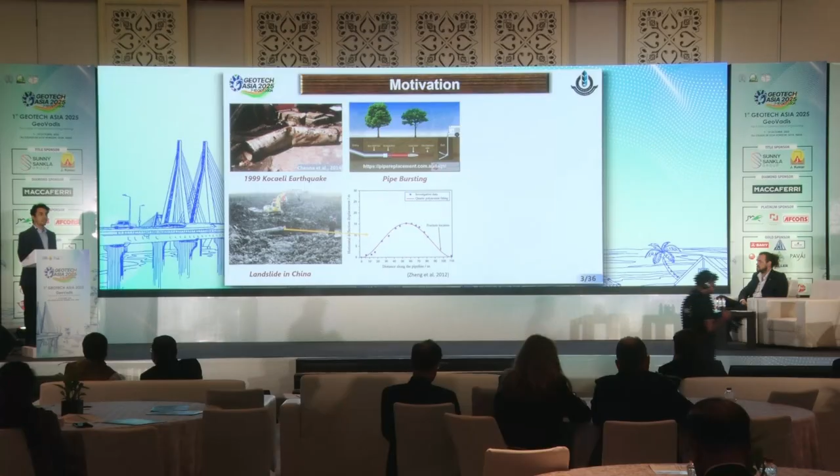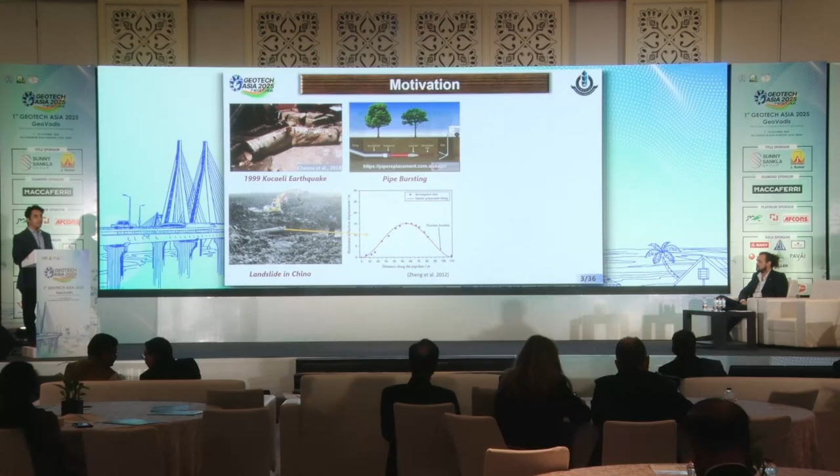Another source of loading that can cause pipe failure is pipe bursting. Pipe bursting is a trenchless technique. During this operation, an expander is attached along with the new pipeline, and the new pipeline takes the position of the existing pipeline. During this pipe bursting operation, ground heave is generated, which can have a severe impact on the surrounding underground utilities, if any.

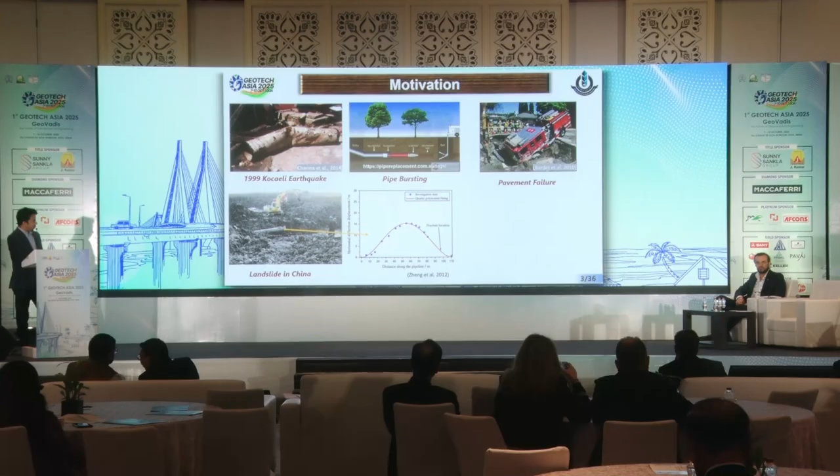Nowadays, pipelines are very often placed below the road pavement, either across or along the direction of the traffic roads. So pipelines also fail because of traffic. We have to design the pipe in such a way that it can sustain the overburden pressure and also the heavy traffic load. Pipes can also be subjected to blast load.

So this is another pictorial presentation. A blast load can be surface waves, an underground blast wave, or above ground, that is, an air blast. The blast source can be a terrorist attack, accidental damage, or blasting required for construction. This pictorial shows the different types of blast and their sources. Typically, we can design the pipeline analytically considering the blast as an exponentially decaying function.

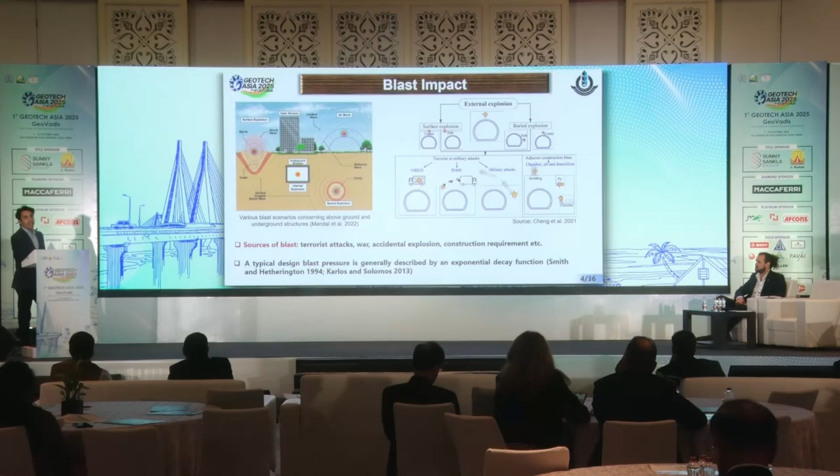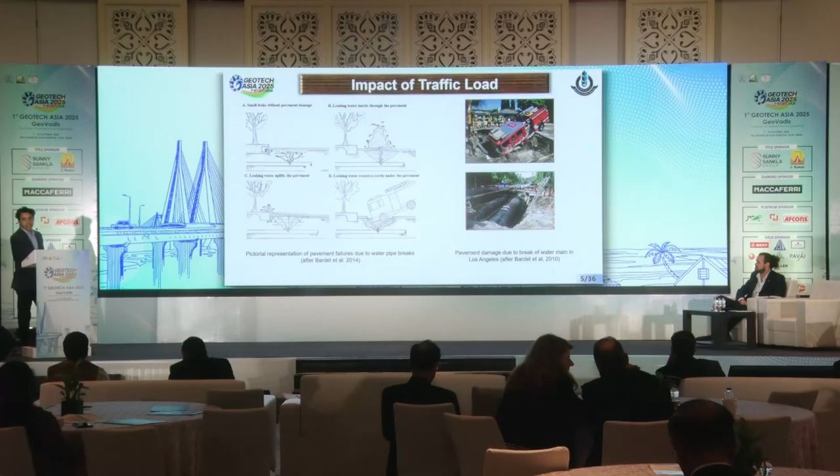These are pictorial presentations of what happens if the pipeline fails below the road pavement. For a water pipeline, leakage may happen without affecting the pavement, it can pass through the pavement, it may cause uplifting of the pavement, or, as in the fourth figure, a cavity may be generated below the pavement, depending on how much failure happened. This is one real field scenario that happened in Los Angeles as reported by Bardet et al. Similarly, Li et al. also investigated concrete pipelines.

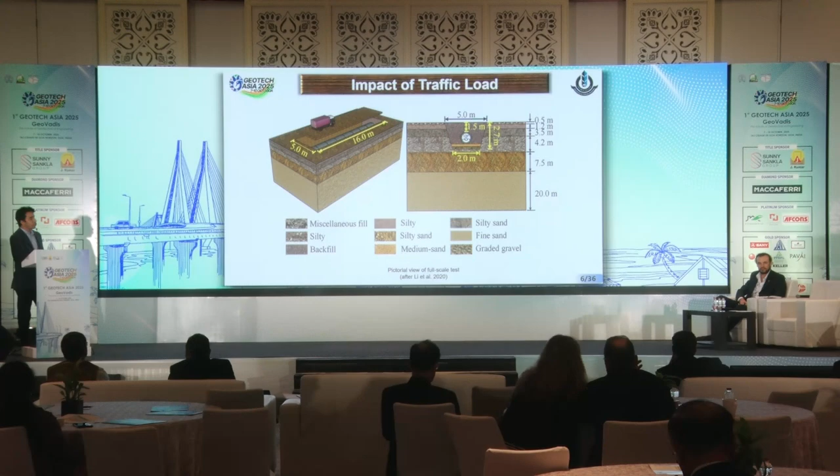It has been found that when the heaviest axle load is placed just above the pipe crown, it causes the most unfavorable condition. This small video clip also shows the consequences that may happen if the pipeline fails; it will impact not only the consumers of the pipeline but also the traffic flow.

Now coming to the different modes of failure of pipelines, there are a total of four modes. The first one is shell mode buckling. This type of failure happens particularly in large diameter pipelines buried in a deep trench, as in the first figure, under compressive load or bending stress. Comparatively, for a smaller diameter pipeline placed at shallow depth, the soil will try to resist the uplift movement of the pipeline, and this failure mode is defined as beam mode buckling.

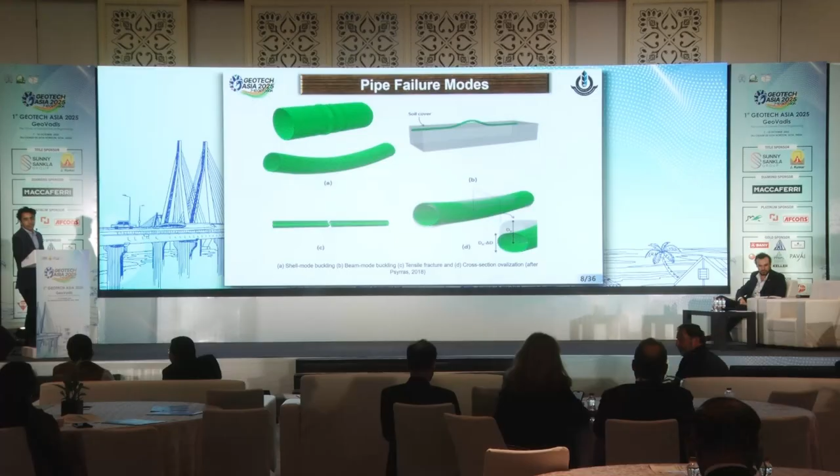The pipe may also be subjected to tensile force, and because of that, tensile fracture may happen. So we have to design it in such a way that it has more ductility, because more ductility will resist such kind of failure. Again, during the loading condition, the pipe cross section may change from circular to oval, so such kind of ovalization failure may happen.

Instead of the beam element, we can go with the shell element also, or we can design it as a plane strain model, because the pipe, as we know, can be considered a one-directional element. Or if we want to model soil-pipe interaction more realistically, we can go with the three-dimensional finite element model. Each of the modeling techniques has some advantages as well as drawbacks.

If I talk about the first one, the beam spring model, although it's not that accurate, we can get very quick results, and it is economical, as it will not take much time to get the response of the pipeline, but of course with approximation. But if we want a more realistic one, we can go with the detailed three-dimensional analysis. But it's time consuming.

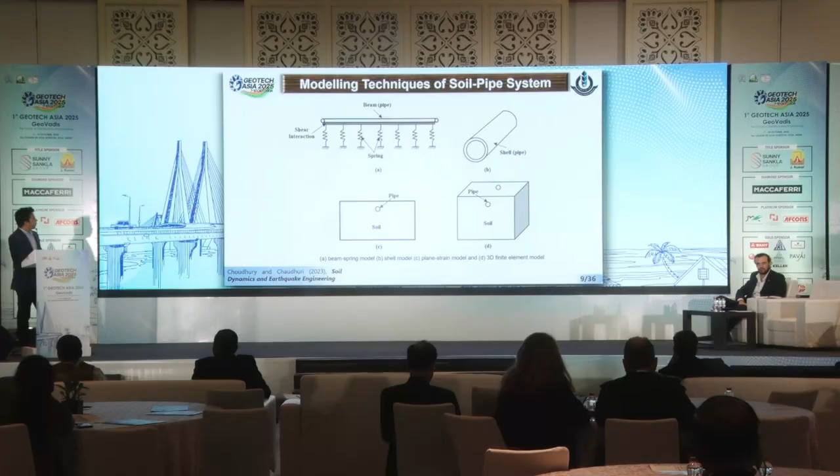So based on the relevance of the work, we have to decide based on certain parameters, such as how much time it will take, how much it costs, and how much accuracy we need. Based on that, we can go with the proper modeling aspect. So coming to my work, the first work particularly focuses on underground blast load. What is its impact on the pipeline response?

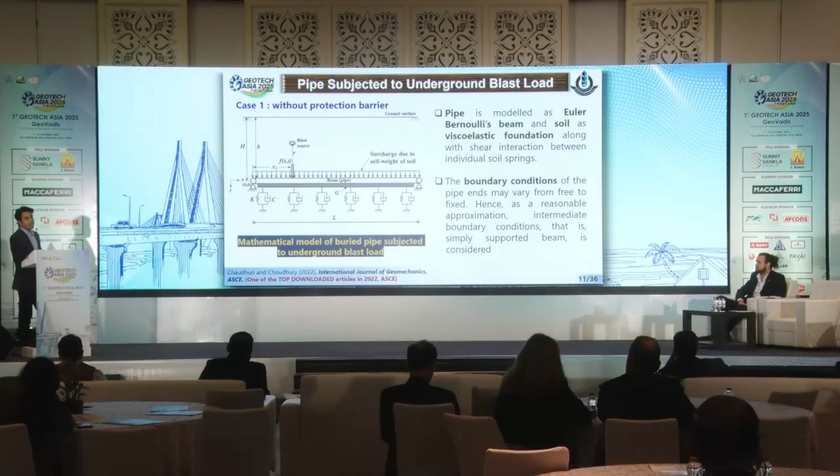So basically, the pipe has been considered as an Euler-Bernoulli beam element, the simplified one. That is the first modeling approach we have taken. And soil has been represented as a viscoelastic foundation. As it is a dynamic problem, a damper has been introduced, and this surcharge load is nothing but the self-weight of the soil above the pipeline. This is the exponential decay function to define the blast load.

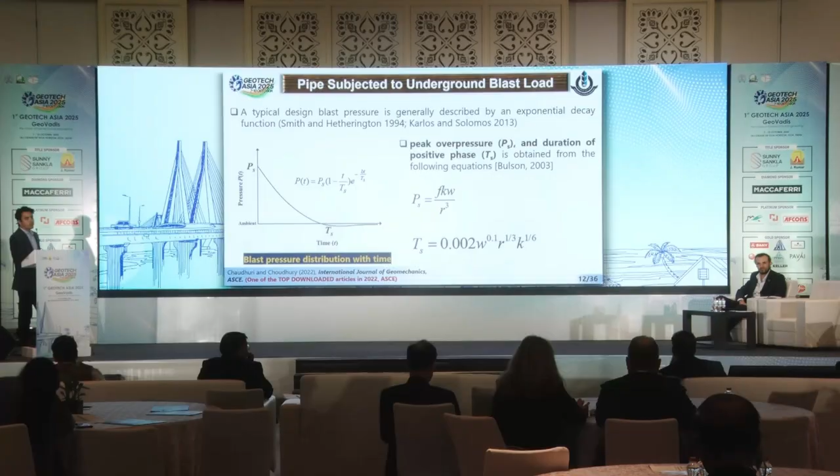What will happen just after the blast? Huge pressure will generate, so PS is the peak overpressure. Within the blast radius, after a certain time, it will reduce to ambient pressure, and further it will follow a negative phase that is much lower in comparison. So in our design, to get the response of the pipeline, only the positive part of the blast load has been considered. This is the governing differential equation for the pipe deflection and the corresponding solution. Once you get the displacements, we can derive the other parameters as well. I am not going too much into the mathematical complexity.

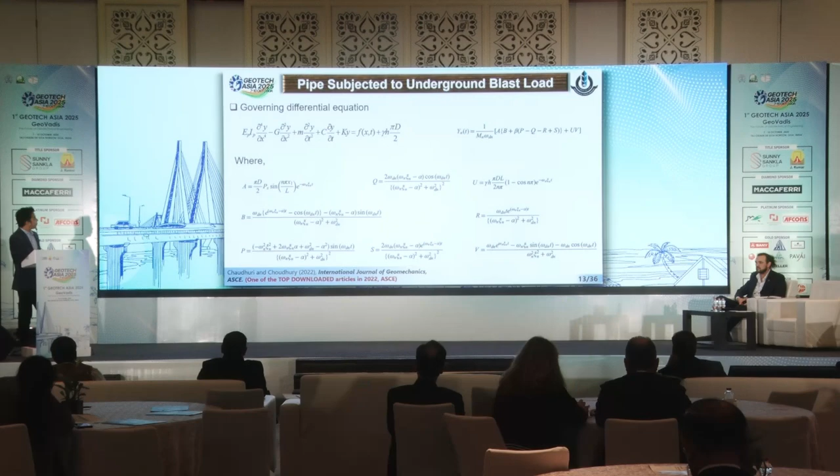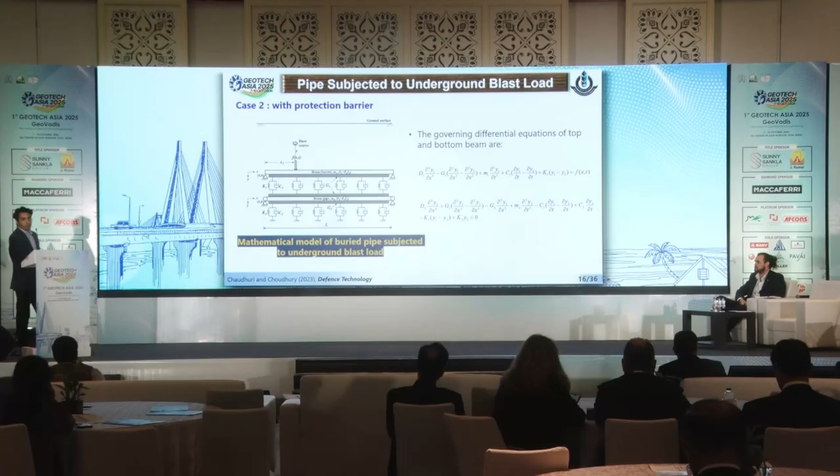In case 2, the earlier problem had basically a blast and the pipe. Now we have introduced another barrier layer as a protection layer. It can be a flexible barrier or a rigid barrier. For the mathematical expression, we can consider it a double beam spring system, with damping and all those things. This is the coupled governing differential equation. The first equation represents the barrier, and the second one corresponds to the pipe. Once we get the displacements, we can similarly produce the other responses.

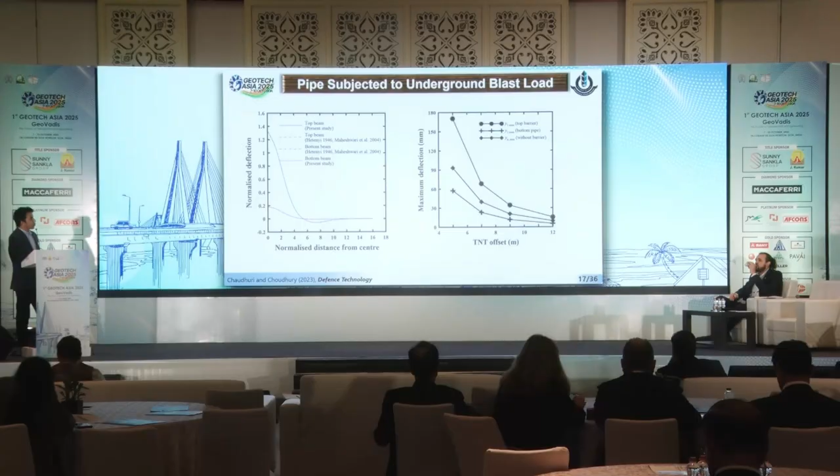So this is one of the validation studies, and from the second picture we can see the bottom curve representing the displacement of the pipe if there is an in-between barrier layer, and the middle one is without any kind of protection layer. So we can conclude that if we provide the protection layer in between, the pipe response is going to reduce.

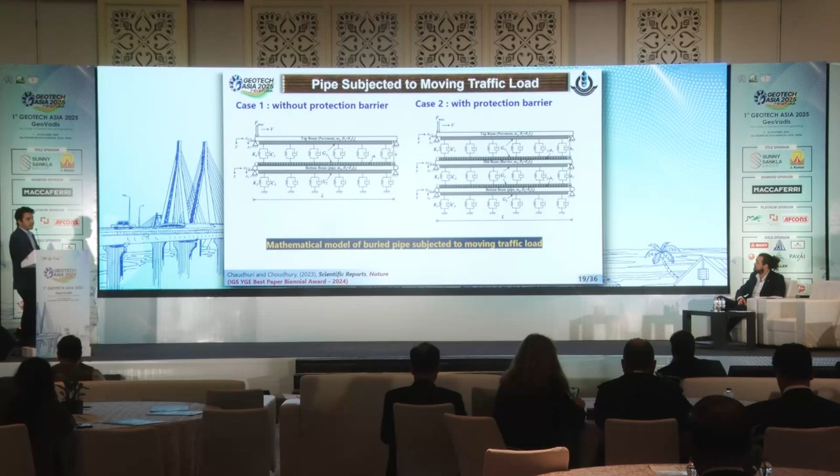So the next part is particularly focusing on the traffic load impact. Similarly, here also two cases have been considered like earlier. In one case there is a pavement, and below the pavement there is a pipeline. This is again the double beam spring system, and in case 2, in between the pavement and the pipe another barrier system has been introduced. And to generalize the analytical formulation, each of the layers has defined properties. If it is uniform, then K1, K2, K3, all other parameters can be the same, or, based on the surrounding conditions, we can define them accordingly.

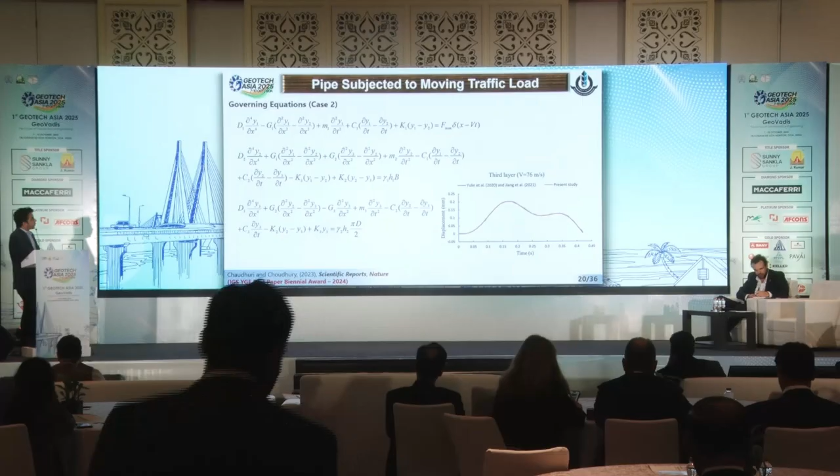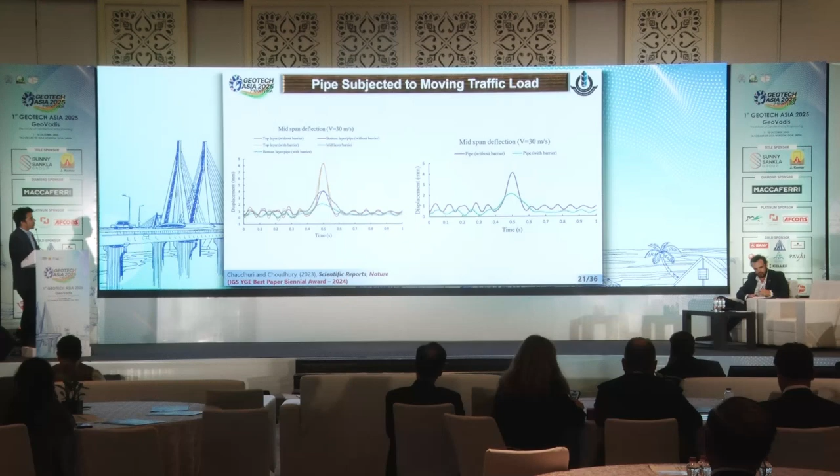And again, these are the coupled differential equations for case 2. If you see D1, that differential equation corresponds to the pavement, the second corresponds to the barrier, and the third, D3, corresponds to the pipeline. And this is one of the validation studies. This is the mid-span deflection time history, how the pipe response changes with respect to time. Here also, if we introduce the barrier system, the pipe response is going to reduce.

So here one thing I would like to highlight is that all the problems I have done are basically based on two simple steps. The first step is to define the governing differential equation based on the particular case. Once we get the differential equation, the next step is to get the solution of that particular differential equation. And how to get the solution? It is based on the proper boundary and appropriate continuity conditions available for our particular problem.

Similarly, this work is particularly focusing on earthquake-induced ground deformation. Initially we consider a cosine function that has been used to replicate the spatially distributed ground deformation pattern. At the center point, where 0, 0 has been defined, that is the peak ground deformation, and that ground deformation reduces to 0 after a certain distance, x1, and beyond that there is no deformation. So we can divide this problem into two zones: one is the deformation zone and the other is the no deformation zone.

Here, instead of Euler-Bernoulli beams, we thought about the Timoshenko beam. The Timoshenko beam has been considered to replicate the pipe, resting on a Pasternak foundation, unlike a Winkler foundation. So these are the coupled differential equations and the corresponding rotation. The rotation term comes because of the Timoshenko beam. The first one corresponds to the landslide zone or ground deformation zone, and the second differential equations correspond to the non-deformation zone. And these are the final solutions, W1(x) and W2(x). W1(x) is the pipe deflection within the deformation zone, and W2(x) represents the pipe deflection beyond the deformation zone.

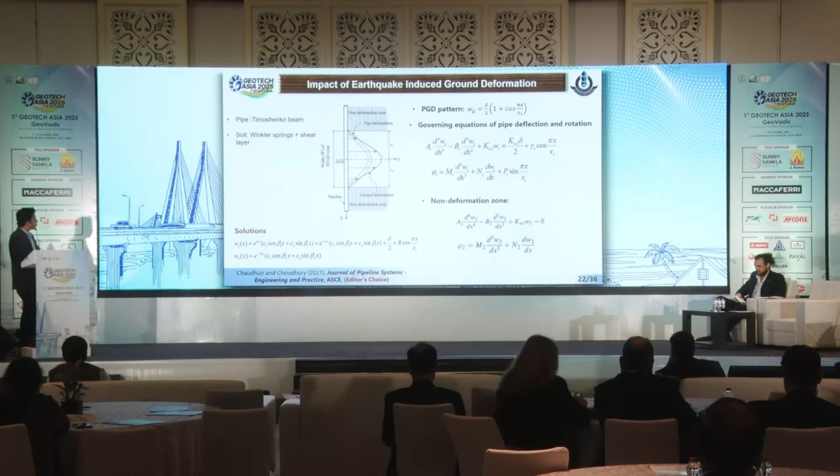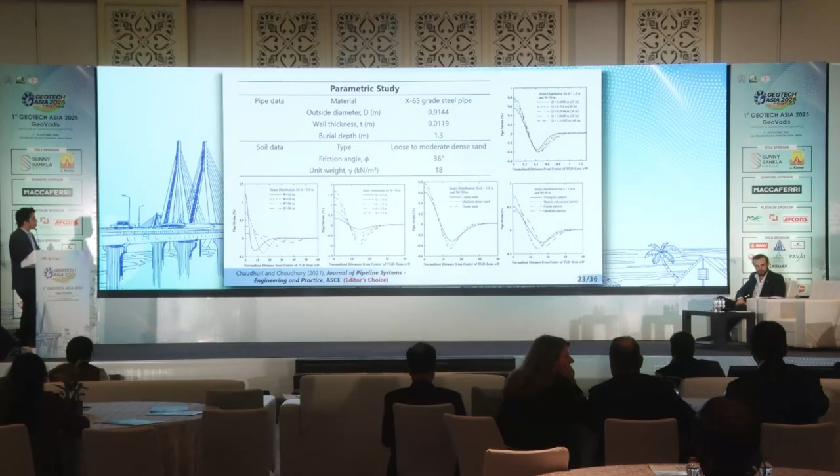From a detailed parametric study also, as usual, changing the pipe diameter, we see the pipe strain or response increases, and the pipe response also changes with the width of the ground deformation zone, the peak of the ground deformation, different types of soil conditions, and we also changed from the initial cosine to other shape functions to replicate the ground deformation pattern, and the thickness as well. Although the trends we get from changing those parameters are obvious, they further validate in one way that our proposed simplified solutions are on the right track.

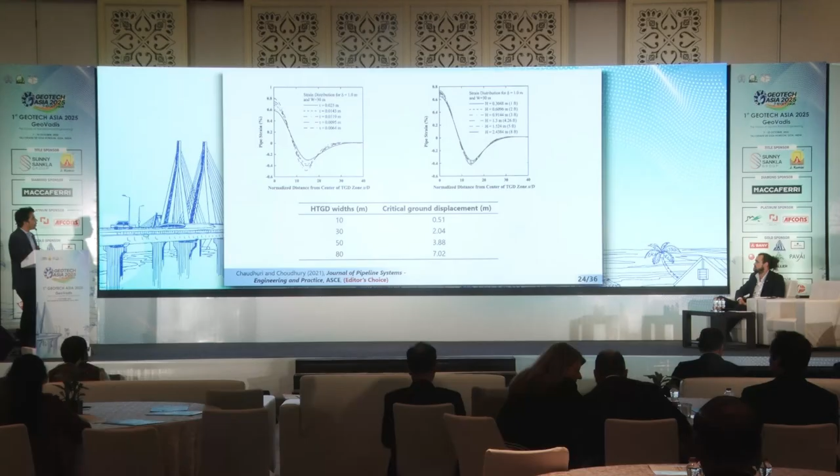And this table particularly highlights how the critical ground displacement has been defined. About this terminology: with increasing initial ground deformation at small magnitude, the pipe will follow the same rate of ground deformation pattern, but after a certain peak, the pipe will not follow the same rate of ground deformation. So the displacement at the instant where the pipe stops following the same rate of ground deformation has been defined as the critical ground displacement.

And similarly, we tried to replicate the real incident that happened in Zhejiang province in China in that landslide. We have found from literature that we can use the quadratic differential polynomial function, if you see the first differential equation on the right hand side, to replicate the actual ground deformation pattern that happened in that landslide incident.

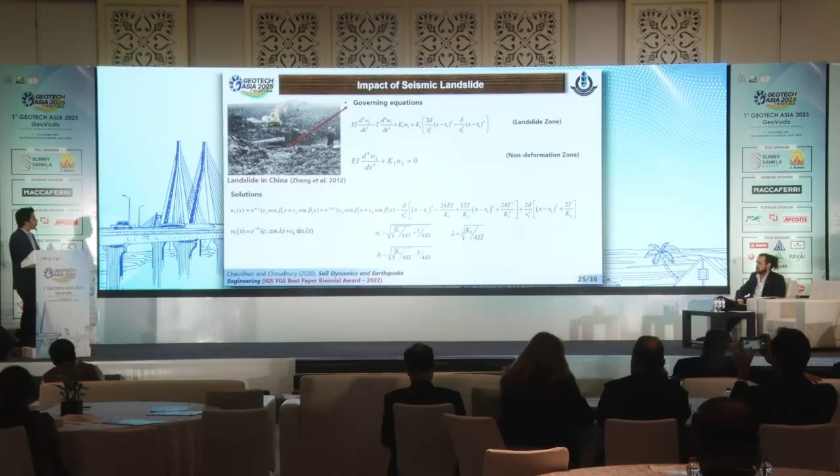And the second one is again beyond the non-deformation zone. And similarly, based on the conditions, we can get the final solution W1x, W2x, again in the same fashion. W1x represents the pipe deformation pattern within the landslide zone that happened in Zhejiang province of China, and W2x we can get beyond the deformation zone.

And at last, we try to get the response of the pipe subjected to pipe bursting underneath. As I discussed, during the pipe bursting, ground heave will generate. And what is the impact of that ground heave on the adjacent pipeline, if there is? So from the literature it has been well established that such kind of ground heave due to pipe bursting or settlement due to tunneling can be well represented by a Gaussian error function.

So basically Sx, that function represents the Gaussian error function. It is a function of theta, that is a generalized form. Theta represents the intersection angle between the pipe bursting. If you see the left hand side figure, the pipe bursting location defines where that operation is going on, and above that there is another pipeline.

So in this particular figure, theta is 90 degrees. So theta can be any intersection angle between the adjacent pipe and the pipe bursting axis. So that has been incorporated in our analytical solution, and these are the Wx as the final solution of the pipe deflection considering both the Euler-Bernoulli beam and Timoshenko beam.

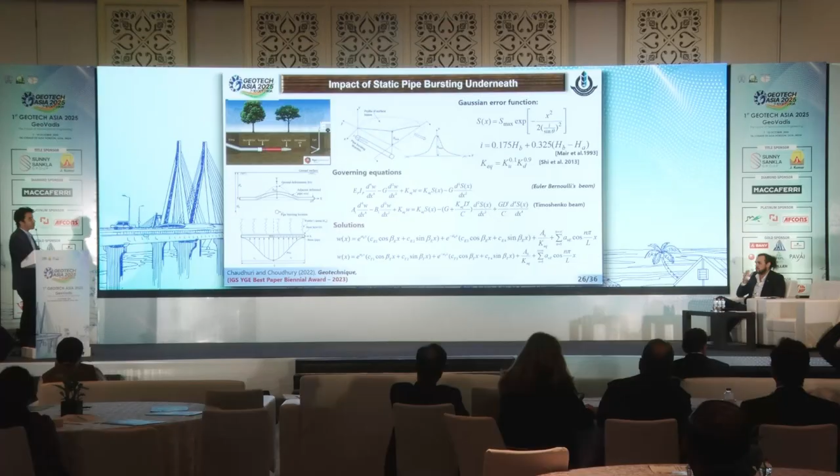And now, so far, considering different loading scenarios, I have proposed some kind of simplified analytical solutions. But in the next few slides, I will highlight some of the validation study that has been made with respect to experimental data as well as three-dimensional numerical analysis.

So again coming back to the pipe bursting operation, earlier Cholewa et al. 2009 performed a full-scale experimental study in similar fashion, where an unreinforced concrete pipe was replaced by an HDPE pipe, and above that there was a PVC pipe, and then they tried to get the response of that adjacent PVC pipe due to the pipe bursting operation underneath, and the response has been recorded in terms of pipe deformation and pipe curvature, as we can see from the right hand side figures.

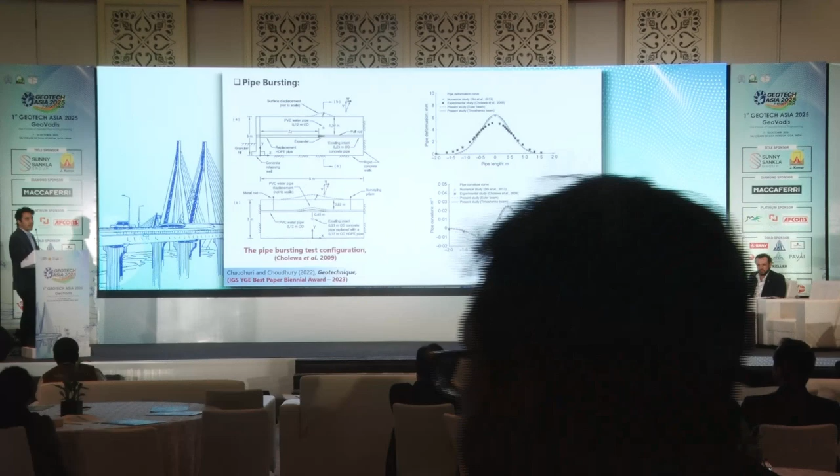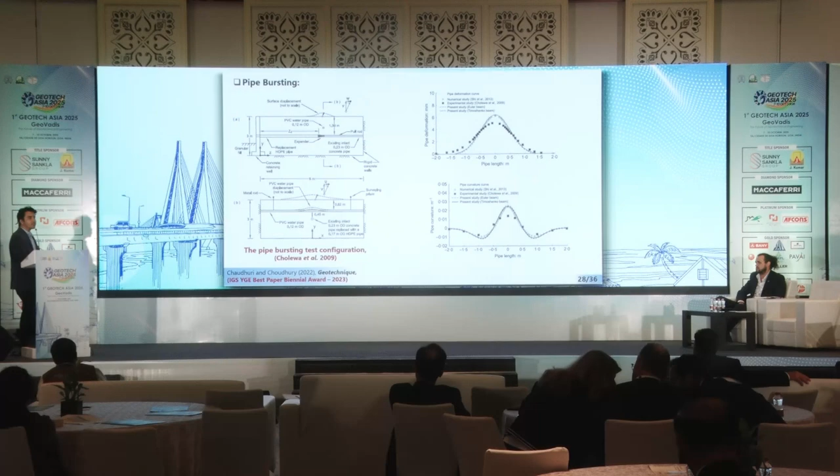And later on, the same concept has been replicated by Shi et al. in numerical analysis, although the numerical analysis is also simplified, where beam and pipe-soil interaction spring elements have been used to replicate the soil. And that concept has been validated with our proposed simplified analytical solution. You can see the experimental results give a little underestimation, or it will be more appropriate to say that our closed form solution gives a little overestimation in results. That is because of the simplification, but those variations are within the acceptable limit.

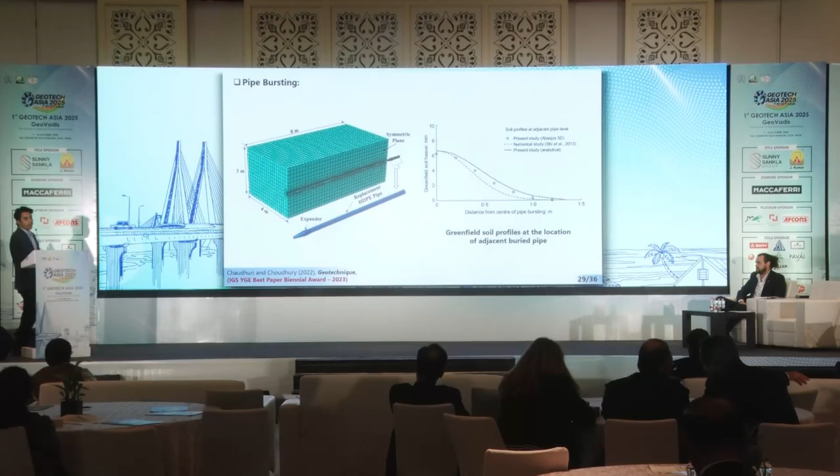Similarly, from our end, independent numerical analysis has been performed to replicate the pipe bursting, and we have recorded the greenfield ground heave profile at the location of the adjacent pipe, and that has been validated with the 3D numerical analysis as well as the proposed closed form solution.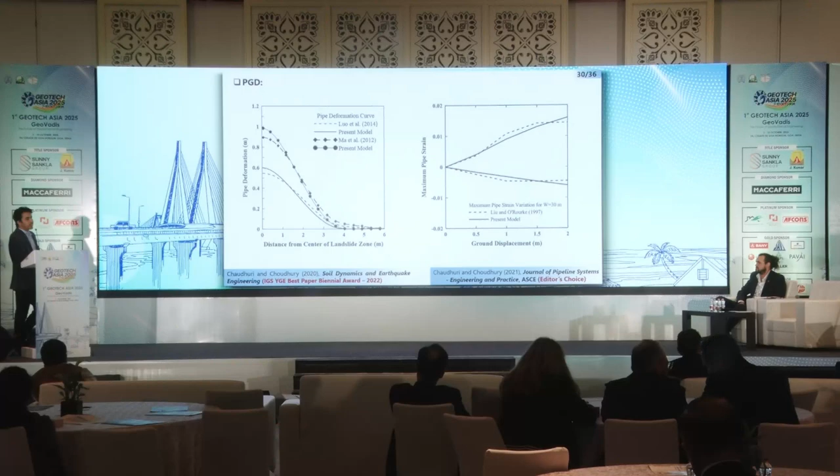And similarly, for the case of the ground deformation pattern, the proposed solution has also been validated with past numerical analysis. And from our end we have also performed three-dimensional numerical analysis. Here, for the block pattern ground deformation, we have shifted from spatially distributed to abrupt, just to cross-check whether the analytical formulation will give the appropriate result if we change the functions, and it has been compared with the numerical analysis as well.

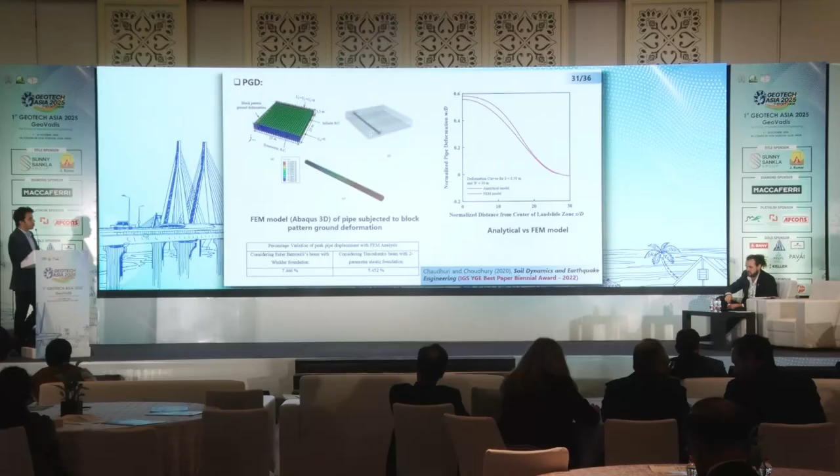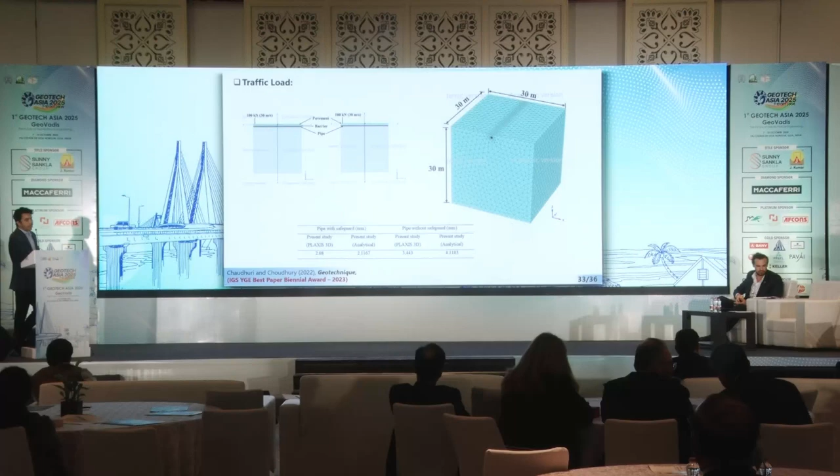And for the blast load also, it has been validated with the centrifuge and three-dimensional numerical analysis. And for the traffic load also, validation with respect to past studies as well as numerical analysis has been performed.

So from all the validations, what I can say is that all the validation is perfect, but of course there is a little overestimation in results, but within the acceptable limit. So with those kinds of analytical solutions, we are getting results very quickly, within a fraction of a second, because if we plug those final expressions into a spreadsheet, the only thing is we have to provide the input parameters, and we can get the pipe response. It will not be as time consuming as case-specific numerical analysis. So we have some drawbacks, and we have some advantages.

So coming to the key takeaways: we proposed generalized closed-form solutions to evaluate the pipeline response under traffic and explosive loads. Those mathematical models are also extended to the case of the pipe subjected to other loading scenarios such as earthquake-induced ground deformation. And most importantly, I would like to highlight the third point. These models offer practical tools for engineers to estimate the pipeline response efficiently, especially in the preliminary design stage, without relying on resource-intensive detailed numerical simulation. So by capturing the critical aspects of pipe-soil interaction and deformation mechanism, the proposed formulation contributes towards safe and resilient pipe infrastructure.

So at present, I am extending this research towards the green energy sector, particularly focusing on district heating and cooling systems and geothermal, because in those cases pipelines also play a very vital role. As you know, because of temperature variation or seasonal variation, or because of HPHT pipeline sudden shutdown, the pipe is subjected to a huge number of cycles, more than 1,000. So the pipe will be subjected to a number of axial loads. Then what will be the exact axial soil resistance? That has not yet been taken care of.

Even if we talk about the international guidelines, American Lifeline Alliance or ASCE guidelines, whatever closed-form solution has been given to estimate the axial soil resistance is not capable of replicating those kinds of specific cases like DHC or geothermal energy where temperature will vary. So my intention is to experimentally understand the pipe-soil interface behavior and the actual soil stress distribution because of a number of axial cyclic loads, and finally to propose a closed-form solution that can be helpful to estimate the actual soil resistance. Thank you so much for your kind attention.

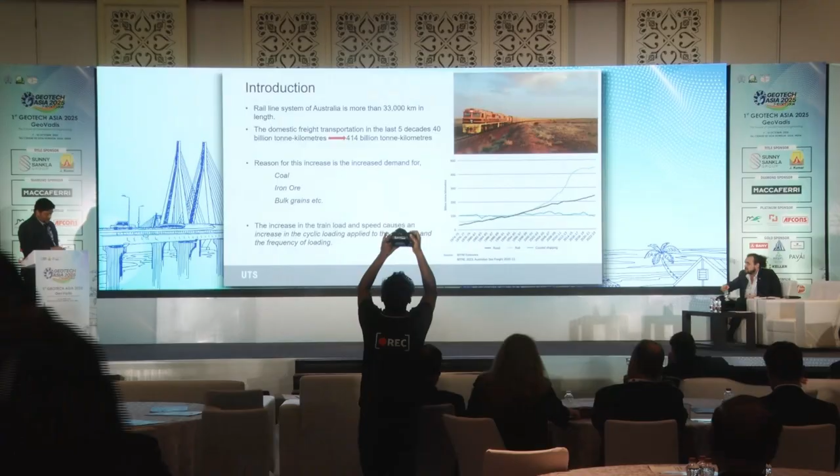Right. Moving on to the introduction. Australia has one of the largest railway systems in the world, with more than 33,000 kilometers in length. During the past few decades, the demand for railway transportation has increased significantly. You can see from the figure, sourced from the Bureau of Infrastructure and Transport Research Economics in Australia, that after the year 2000, the demand for railway transportation has increased almost exponentially. The reason behind this is the increased demand for bulk goods such as coal, iron ore, bulk grains, etc. So because of this, railway companies have opted to use heavier and faster trains.

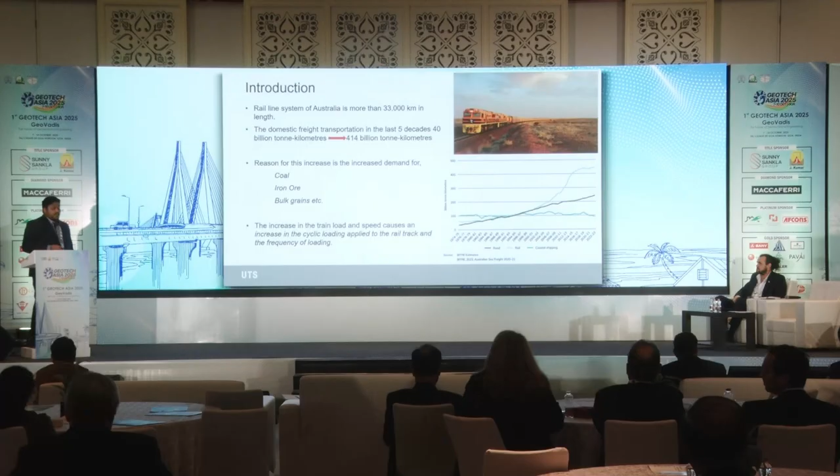So what happens when we use heavier and faster trains? Higher and higher loads are being applied to the rail track at high frequency. So of course, when higher loads are applied to the rail track at high frequencies, several track problems occur. One of the major problems is ballast degradation, that is, breakage of ballast particles. That is a very serious problem because it leads to other major issues like ballast fouling, differential track settlement, improper drainage, and lateral buckling of track.

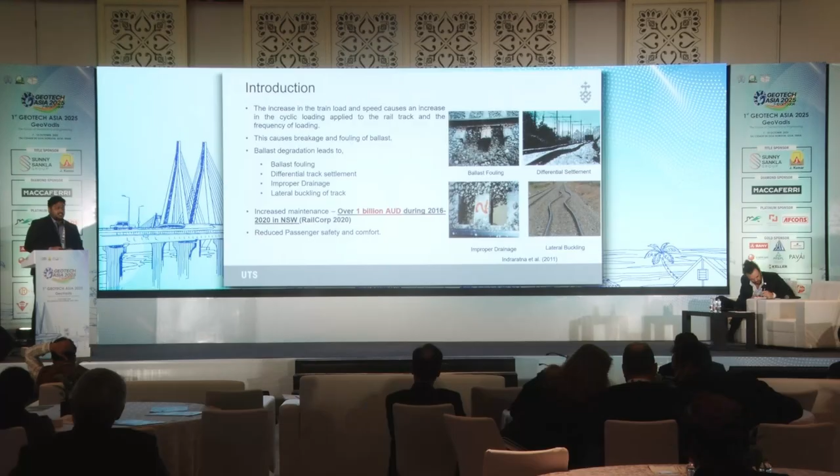Like you can see some track issues in the figures to the right side of the screen. And these problems, these track issues, reduce passenger safety and comfort. And in the state of New South Wales alone, in Australia, over $1 billion Australian have been spent during the period between 2016 to 2020.

So what can be done to address these track problems? So the main thing we can do is include some kind of a stabilizing inclusion within the track substructure. One of such inclusions is geosynthetics, like geogrids, geocells, geotextiles, or geocomposites. The main function of these geosynthetics is they reinforce the track substructure, mainly the ballast layer.

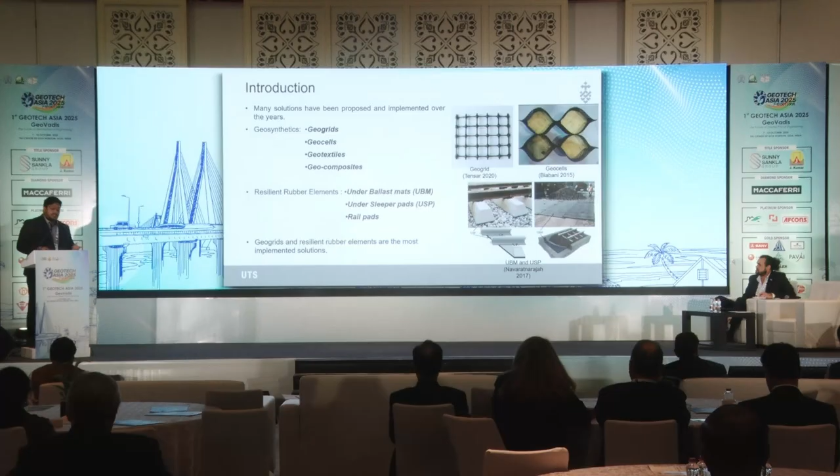And the other main track stabilization method is including resilient rubber elements within the track substructure, like under ballast mats, under sleeper pads, rail pads. The main function of these resilient rubber elements is they increase the energy dissipation capacity of the rail track. And geogrids and resilient rubber elements like under ballast mats are two of the most commonly used track stabilization methods.

Even though geogrids and under ballast mats are two of the most commonly used track stabilization methods, they have inherent disadvantages. If you look at geogrids, they sometimes undergo rupture under high stresses and lose the reinforcement capacity. And geogrids do not dissipate energy that well because geogrids are made from plastics, polypropylene, polymers like that. And geogrids do not perform well in reducing ballast breakage. That is because they do not dissipate energy that well.

If you look at under ballast mats, they do not allow free drainage through the layer because under ballast mats are a continuous sheet of rubber. And under ballast mats do not provide adequate reinforcement to the ballast layer. Thereby, they do not reduce the lateral spreading of ballast that much.

So, in order to address these problems of geogrids and under ballast mats, and to combine the particle interlocking property of geogrids and the energy dissipation property of under ballast mats, we have proposed recycled rubber energy absorbing grids. These recycled rubber energy absorbing grids combine the particle interlocking property of conventional polymer geogrids and the energy dissipation property of rubber under ballast mats.

These rubber grids are derived from discarded conveyor belts from the mining industry, mainly in Western Australia. As you can see, these discarded rubber conveyor belts are very bulky. They take up a lot of space in landfills. So kilometers and kilometers of length in discarded conveyor belts go to landfills every year.

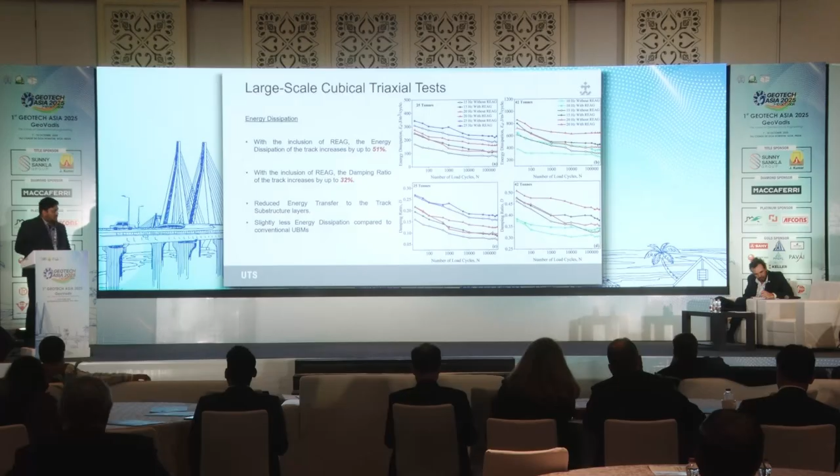Moving on to energy dissipation, one of the main intended functions of this rubber grid is the increased energy dissipation. By increased energy dissipation, these rubber grids reduce the amount of energy transmitted to the ballast layer, thereby reducing ballast breakage and crack formation. And it was observed that with the inclusion of the rubber grid below the ballast layer, the energy dissipation of the track increased by up to 51%. And the damping ratio of the track increased by up to 32%. And like I said, it reduces the amount of energy that is being transferred to the ballast layer.

And we observed that there is slightly less energy dissipation compared to conventional rubber underballast mats, because when we use underballast mats, there is a higher volume of rubber within the track sample.

Right. Moving on to ballast breakage, as expected, when rubber grids were used, ballast breakage reduced significantly. Like I said before, when we prepared the sample, we used a 300 millimeter thick ballast layer. We divided the ballast layer into 3 parts of 100 millimeter thickness each. So after each test, we take out the ballast carefully and sieve it to get the new gradation and compare it with the initial gradation curve of the ballast. And we use the gradation curves to calculate the ballast breakage.

So we observed up to 21% reduction of ballast breakage in the top ballast layer, and up to 44% and 51% reduction of ballast breakage in the middle and bottom ballast layers. So as expected, the breakage increases with the loading frequency, that is the train speed, and the highest percentage reduction of ballast breakage was in the bottom ballast layer, because the bottom ballast layer was in touch with the rubber grid.

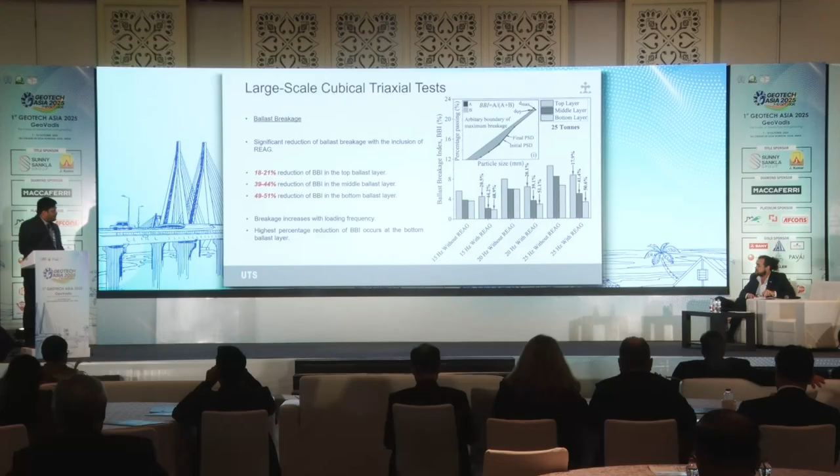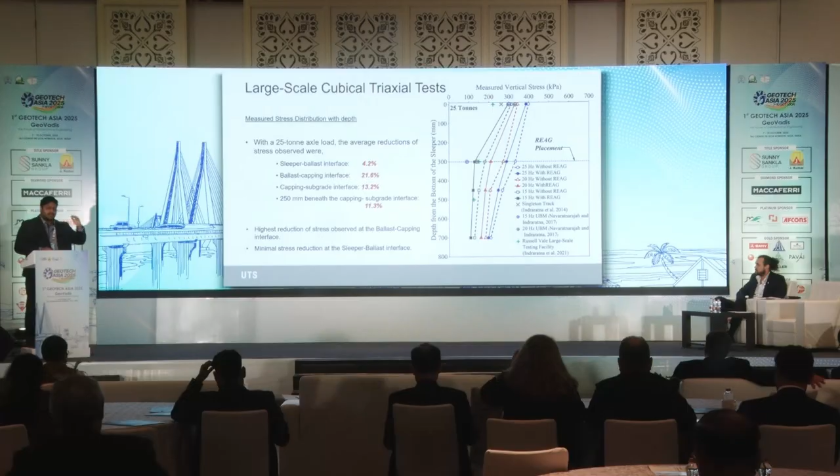Right. So moving on to pressure distribution with depth, we placed 4 pressure cells within the track sample, one at the sleeper ballast interface, one at the ballast capping interface, one at the capping subgrade interface, and the last pressure cell 250 millimeters beneath the capping subgrade interface.

And it was observed that at the sleeper ballast interface, the vertical stress was reduced by 4.2% when the rubber grid was placed, and a 21% reduction of vertical stresses was observed at the ballast capping interface, and up to 13% reduction at the capping subgrade interface, and up to 11% reduction of vertical stresses 250 millimeters beneath the capping subgrade interface when the rubber grid was placed.

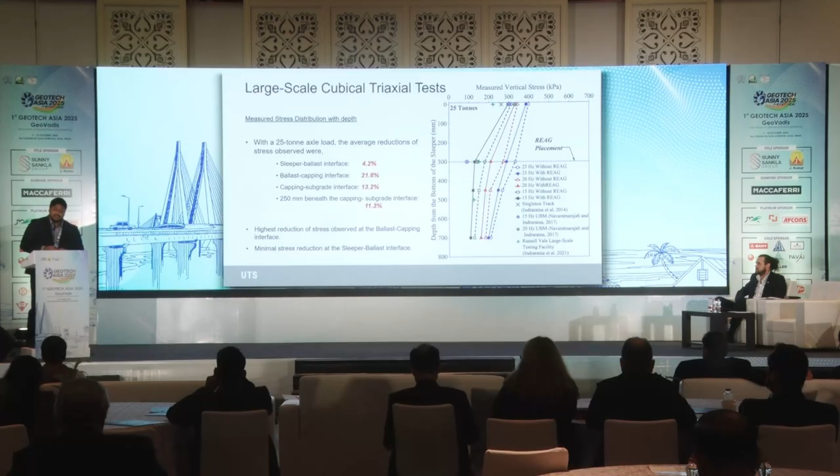And the highest reduction of stress was observed at the ballast capping interface, similarly, because in that interface the rubber grid was placed, and minimal stress reduction was observed at the sleeper ballast interface because that interface is very stiff. Right. Moving on to the field testing of this novel solution.

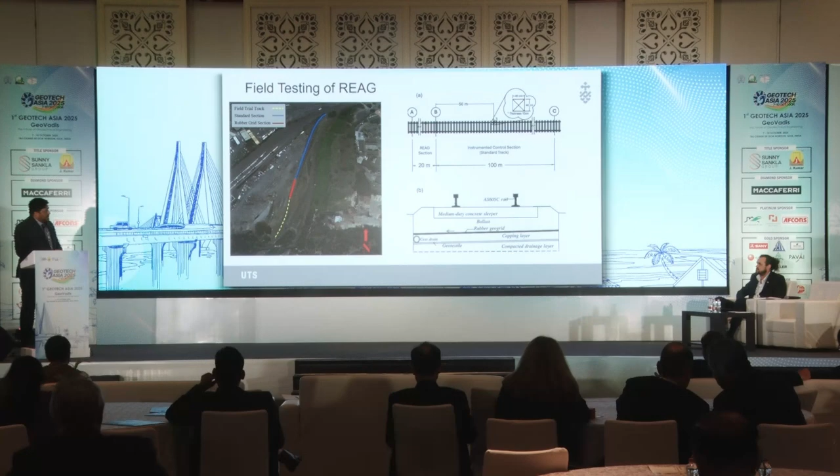To check the effectiveness of this rubber grid in real life track conditions, we have conducted a field test of this rubber grid in Chullora, New South Wales, a suburb in Western Sydney. We conducted this field test in partnership with Sydney Trains, Transport for New South Wales, and several other industrial partners. You can see an aerial view of the field test area, which was done in the Chullora rail precinct, which is a rail yard, and you can see some schematic diagrams of the cross-section of the track.

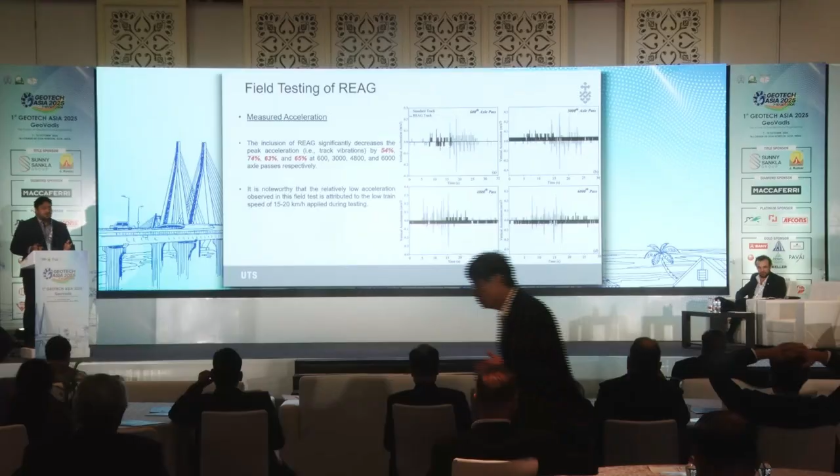And the most important feedback about this rubber grid we obtained was from the train drivers themselves. They said that when they transferred from the standard track section into the rubber grid track section, they clearly felt a difference, in fact a reduction in vibration.

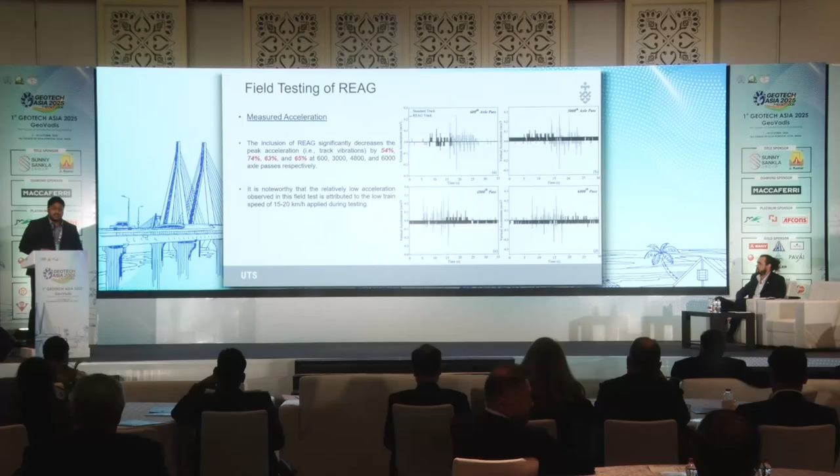Moving on to the conclusions. Significant deformation control: the rubber grid reduced lateral displacement by up to 55% and settlement by up to 60%, outperforming polymer geogrids and the ballast mat. Reduced ballast degradation: overall ballast breakage decreased by up to 55%, with the maximum reduction at the bottom layer, that is the ballast layer in touch with the rubber grid. And superior performance under cyclic loading: under 25-ton axle loads, the rubber grid achieved up to 37% reduction in ballast breakage compared to around 33% reduction for polymer geogrids in similar testing conditions.

And enhanced damping characteristics: the rubber grid reduced stresses by up to 21% at the ballast-capping interface and up to 11% within the subgrade under heavy axle load. We conducted field tests for field validation. The field trials confirmed 7 to 27% reduction in vertical stresses, around 18% reduction in settlement, and up to 74% reduction in vertical acceleration. Because of these observations, we can clearly say that this rubber grid is not just a research concept; it is scalable, sustainable, and proven to be effective both in the laboratory and in the field. Thank you.